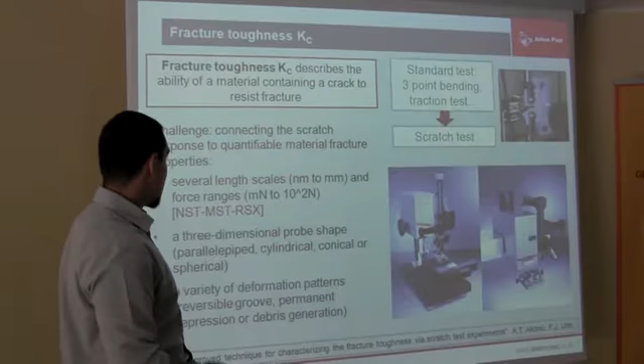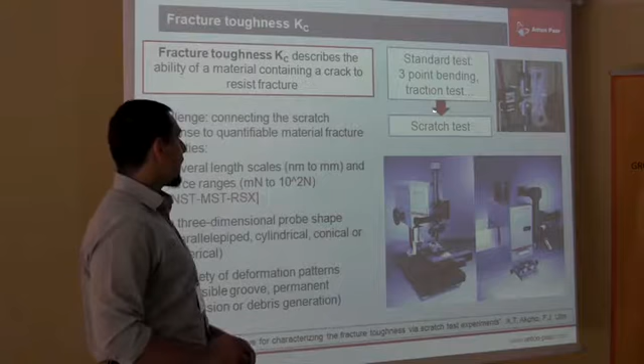Today I will present some work with the scratch tester and indentation tester, done with Professor Ulm from MIT. In this work, we talk about fracture toughness, describing the ability of a material containing fractures to resist this fracture. Usually the standard test needs a pre-crack and is done with 3-point bending, 4-point bending, and traction test. Now we want to show that the use of scratch test can also be a good choice.

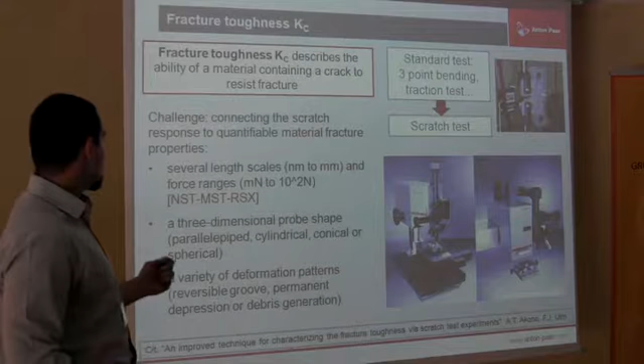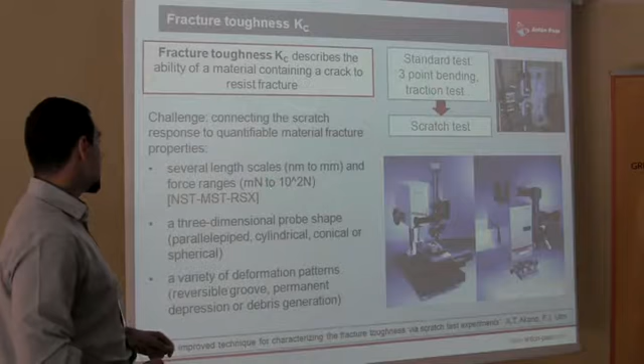The challenge is to connect the scratch response to quantifiable material fracture properties. This is difficult because with the scratch test we have several length scales, from nanometer with the nano scratch test used to analyze very thin layers, up to millimeter and high loads of hundreds of newtons with the Revetest scratch test, which is a macro scratch test.

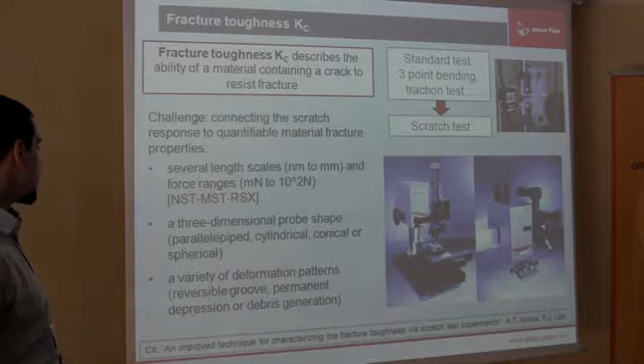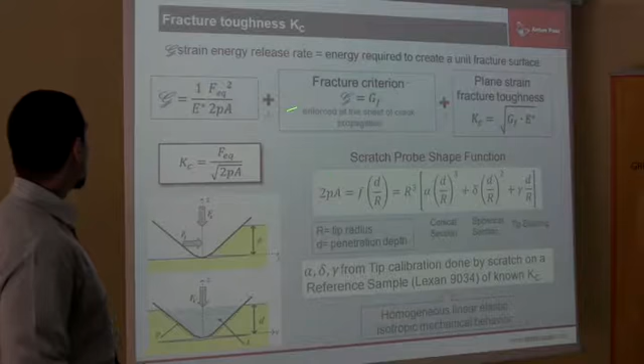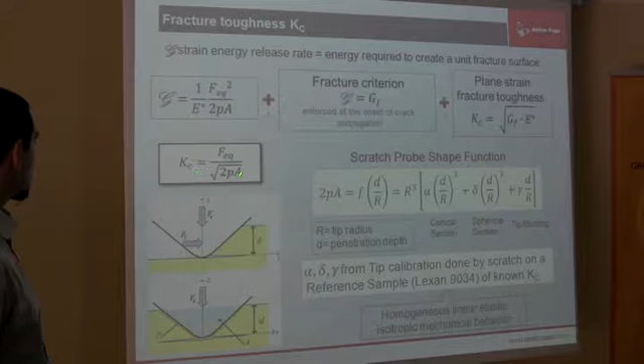Then we have to deal with the three-dimensional probe shape and a variety of deformation patterns inside the sample. To link this property to the probe shape, we use the strain energy release rate, the energy required to create a unit fracture surface. This is linked to the scratch probe shape function, the force applied, and the characteristics of the material. We use this so that at the onset of crack propagation we have a fracture criterion where G is the fracture energy, connected with the plane strain fracture toughness. In this way we can link the fracture toughness to the scratch probe shape function.

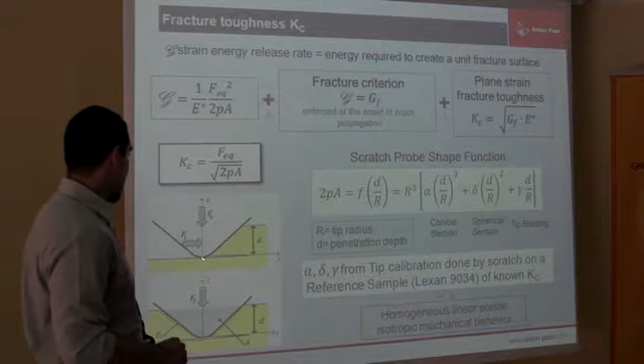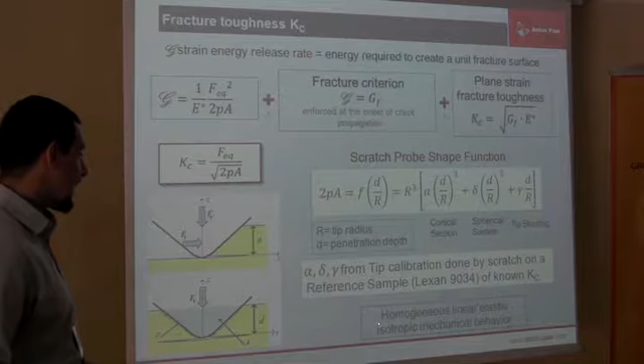This function is presented for a Rockwell tip, with a part for the conical section, a parameter for the spherical end tip, and a part due to the tip blunting. Now we have to find these three parameters from a tip calibration, and we choose a homogeneous linear elastic isotropic material, Lexan 9034, because we know very well the fracture toughness of this material.

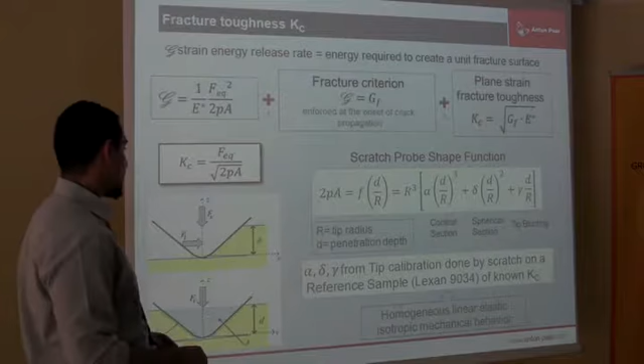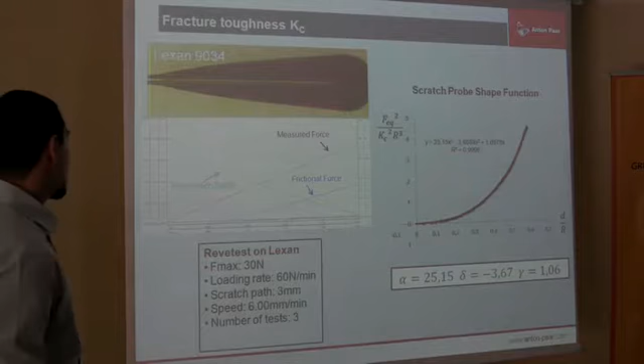This is a scratch done with our instrument. We record the penetration depth, the measured force during application of the force, and also the residual depth after the scratch and the frictional force.

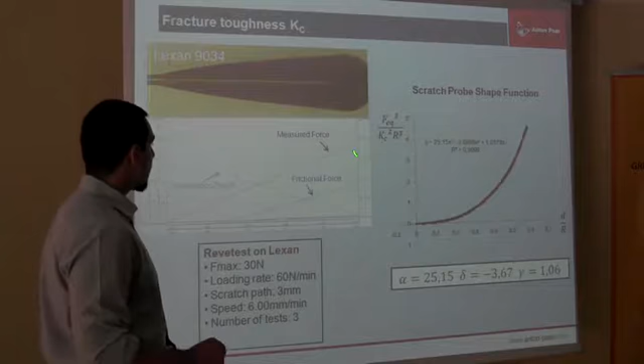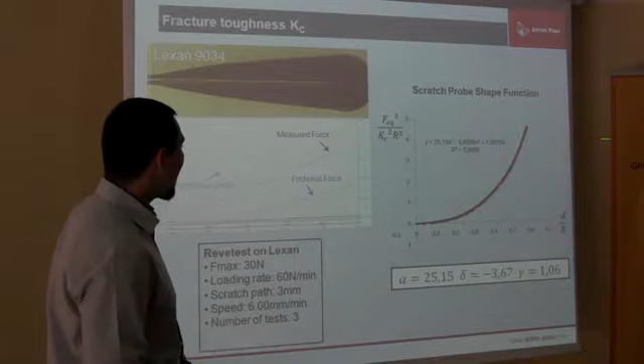Then we plot the value of the scratch probe shape function against the depth of the scratch, and we find the three parameters.

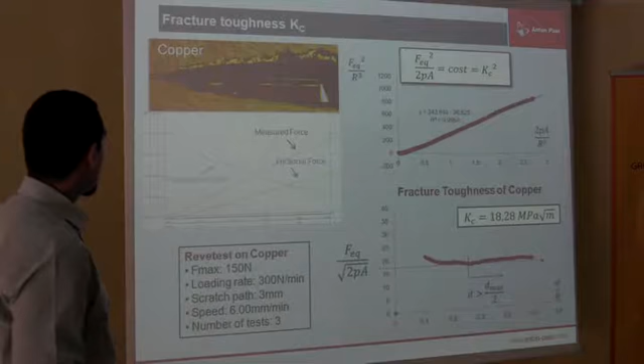Then we do another scratch in copper, recording applied force, penetration depth, and frictional force. We plot the force over the radius of the tip against the shape of our indentation, and we find a linear correlation proportional to the fracture toughness. So we can extract the fracture toughness, and we find a value very close to known values, for copper.

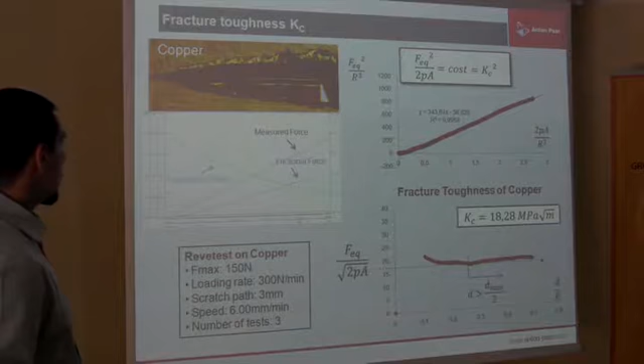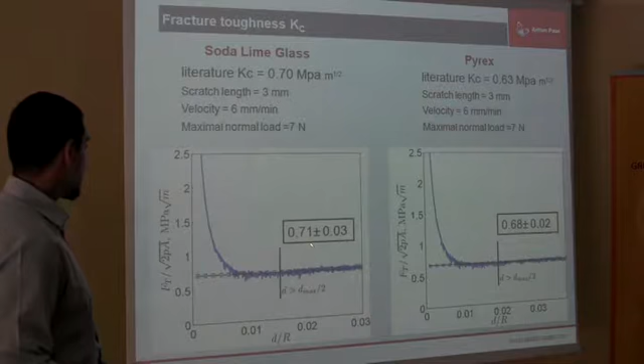Professor Ulm also found the same results with soda lime glass and Pyrex. These results are in very good agreement with literature. So this is a way to evaluate fracture toughness.

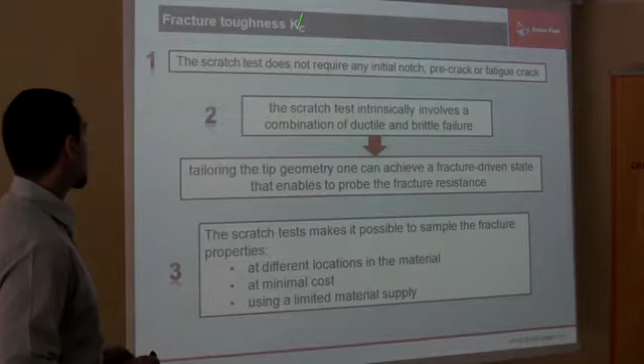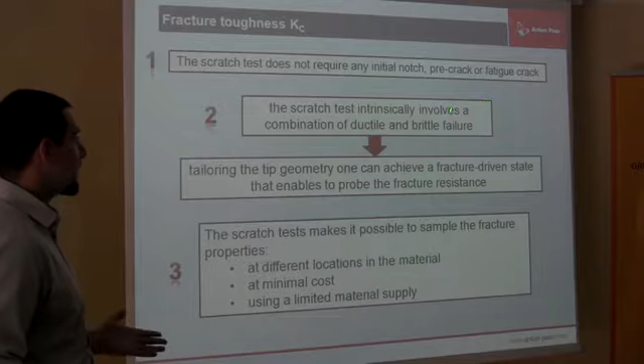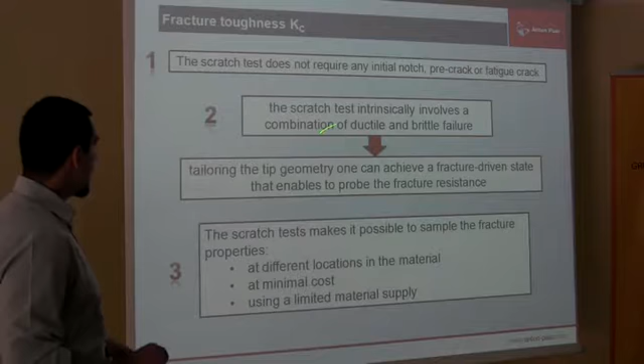The important thing is the scratch test does not require any initial notch, pre-crack, or fatigue crack on the sample. In the same way that we have to choose the initial notch with macro tests, here we have to choose the tip geometry to achieve a fracture-driven state that enables us to probe the fracture resistance.

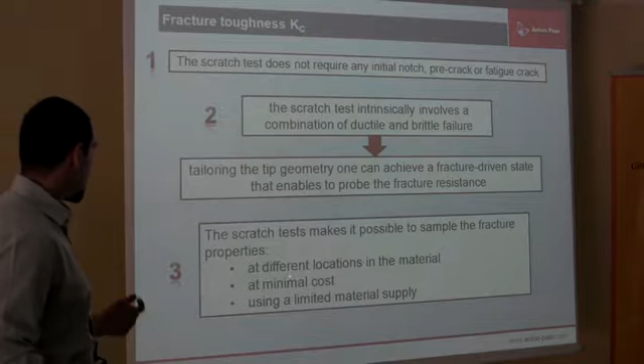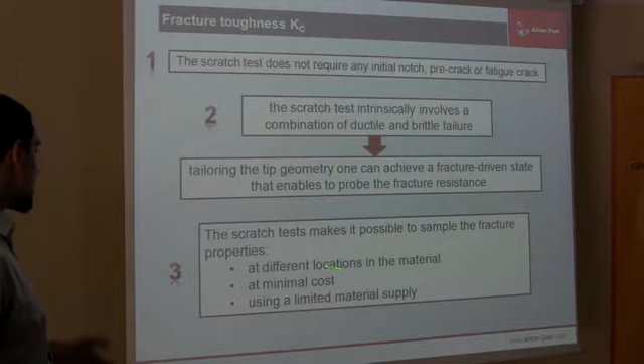With the scratch test, we can sample the fracture property in different locations in the material, so we can also test inhomogeneous materials, with minimal cost and using a limited material supply.

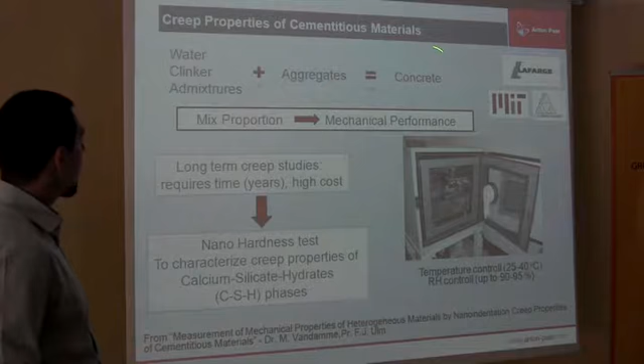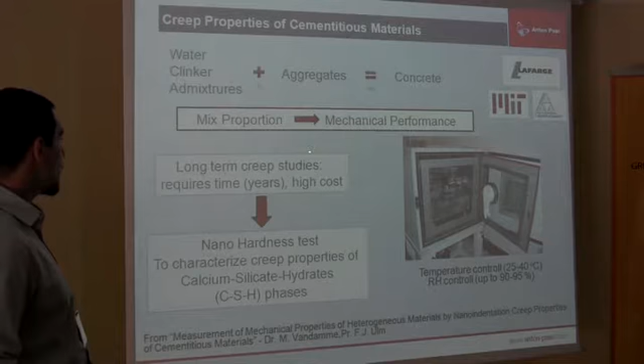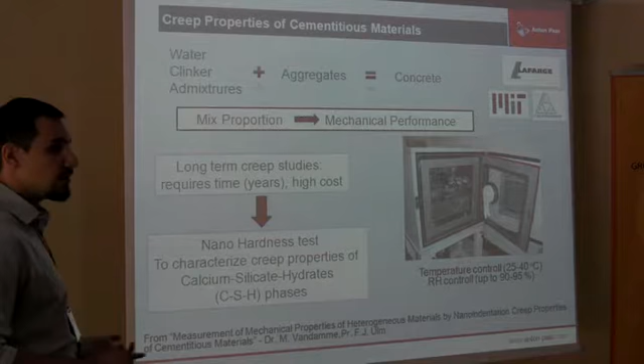Another work also done with Professor Ulm is on concrete, about creep. Concrete is a mixture of water, clinker, and aggregates, and the mixture proportion is linked with the mechanical performance. To test the mechanical performance, we require time, sometimes years, and highly costly tests.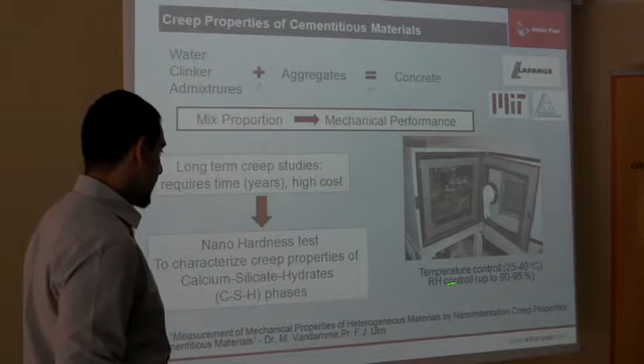With a nano-hardness test in our chamber with temperature and relative humidity control, it will permit you to test the concrete in different temperature and relative humidity ambient conditions.

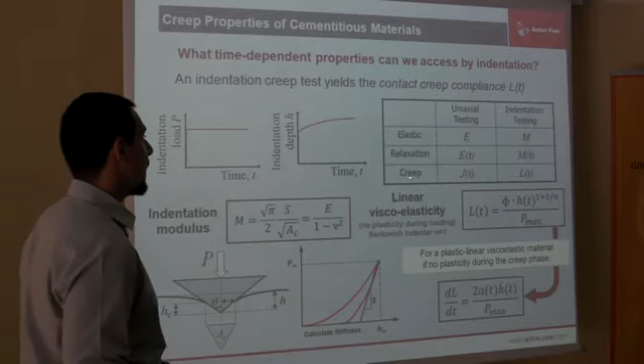We can do the test on the calcium silicate hydrate phases that are strictly connected with macro creep. We have to think about what time-dependent properties we can see with the indentation test: indentation modulus, which is strictly connected with the elastic modulus and the property of the material, and linear viscoelasticity.

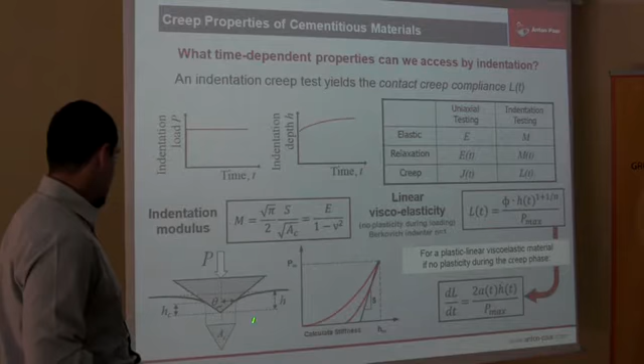In this case, we are looking at conditions with no plasticity during application of the load, and this is the evolution of the linear viscoelasticity with time, connected with the penetration inside the material.

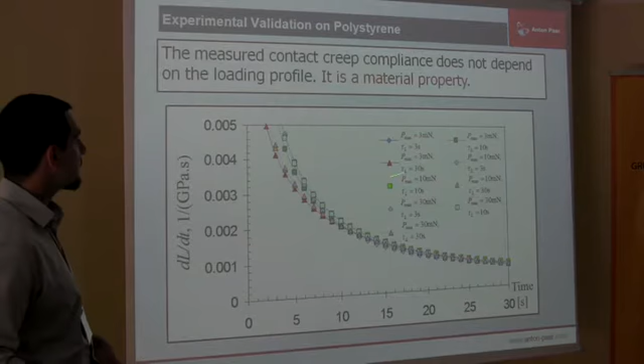So we do some experimental validation on polystyrene, and we find that with different maximum loads and different times required to reach the maximum load, we have the same profile. This means the creep compliance does not depend on the loading profile, and it's a material property that can be checked.

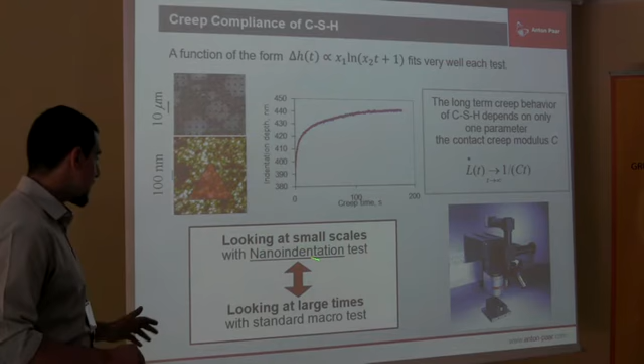The penetration as a function of time can be seen to be proportional to the logarithm of time, meaning the long-term creep behavior of the CSH depends only on one parameter, the contact creep modulus C. This means that looking at small scales with nanoindentation testing in some way means looking at large times with a standard macro test.